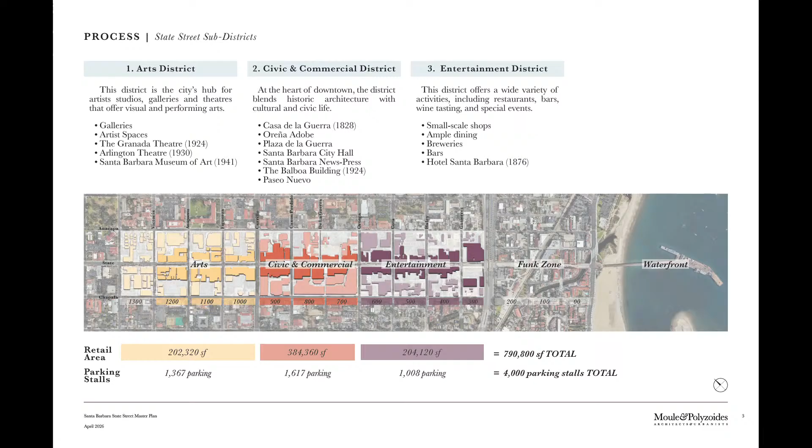So when one comes as an outsider and looks at this from an analytical point of view and sees 800,000 square feet of space divided, as you can see in the numbers in these 3 sub-districts, and 4,000 cars, the first conclusion is that this is a walkable district. That's an important, really a fundamental point of departure.

The other important thing to recognize—I won't spend much time on this—is that when you look at the ingredients of this place, the land uses, the great architectural monuments, this is one of the greatest built downtowns in the country. Its common buildings and civic buildings are really remarkable. The parking distribution, the service access mostly from the back, a bicycle network already active in the place, public transit active, and open space and streetscape also firmly established. So the basic ingredients are all here, maybe at different levels of strength or quality, but they're all here.

So this is a walkable district. It's been run over a long period of time. It has certain characteristics. It is perfectly endowed—it just needs to be rebalanced and rethought.

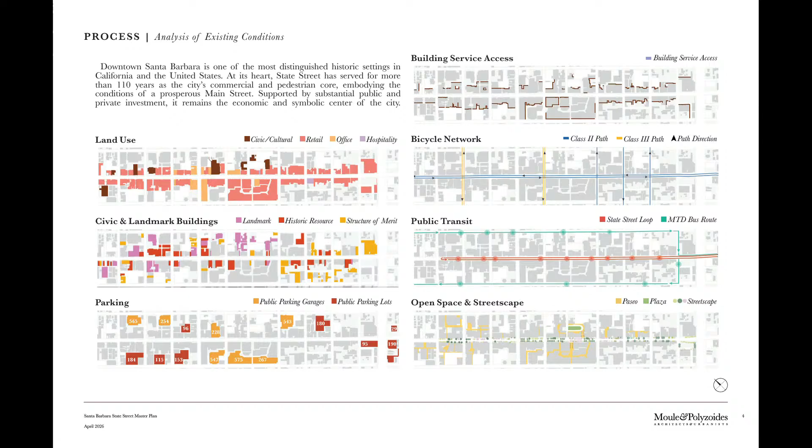We were not part of this from the start—we came into this process relatively late. There was a very robust public process preceding us, but we insisted on meeting with various groups of people to confirm what the key issues were. I'll repeat this because it's too important not to: there are mobility questions, questions of retail quality and levels of performance, infrastructure questions in paving and drainage, and landscape issues, because what's in place is old enough to need to be refreshed and rethought anyway. These are fundamental questions that bear upon how one designs this place in the future.

The idea of a flexible design acknowledges that there are two sides to this argument. There's the side that pedestrian and bicycle-based activities are very prominent and very unique here from a volume perspective, because of the nature of the city, its history, its climate, its location, and its form.

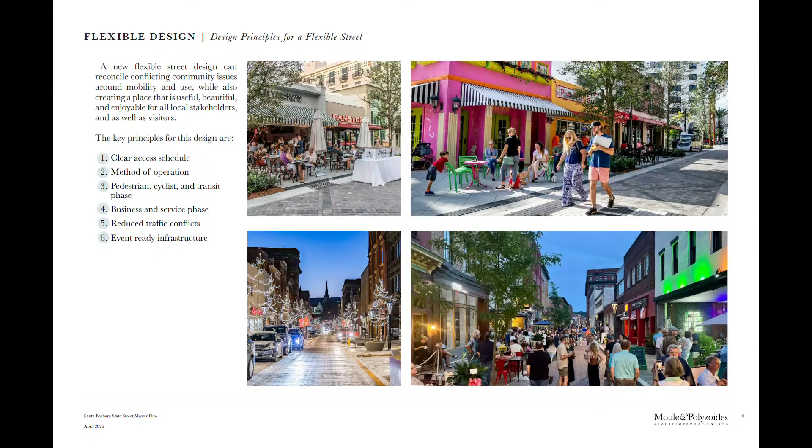There are a few key design issues that make the scheme we propose possible. One of them, most important, is that the street is 80 feet wide. If the street were 100 feet wide, we would be proposing something completely different. At 80 feet wide, with the need for a 20-foot fixed center for emergency access over time, and the need to put this relatively in the middle of the street, we start with a division of 30, 30, and 20, as you can see here.

Then the possibility emerges within the system, particularly if parking is limited to the garages as it always has been, of enlarging the pedestrian sidewalks to 30 feet and allowing a zoning of this 30 feet for outdoor eating and other entertainment uses, as well as walking.

And then in the middle of the block, we can have bicycles and transit during the day, going through to Victoria or even Sola. In the evening, with bollards placed in the street, we would allow both cars and bicycles to mix on the street.

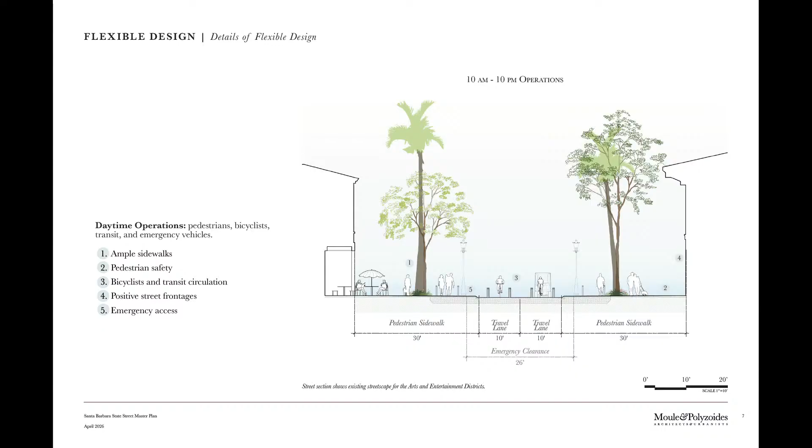In the evening, meaning probably the way we had started, we're showing 10 to 10 operations, 10 p.m. to 10 a.m.—night and early morning, not evening. This allows circulation to exist at a time when the volumes of both pedestrians and vehicles are exceptionally low. That is the mode of evening operation, service and drop-off at night, with all speeds slow and proper lighting.

There are many other issues, of course, that have to be imagined in order to operate such a system profitably and safely.

There is also a design question: because we have so many blocks of activity divided into three, it might be possible that the middle three blocks develop their own landscape, paving, and, to the degree possible, their own visual and architectural character, used in an exceptionally different way than the rest. So there is an acknowledgement in the scheme that nine blocks is too long a street to have exactly the same character.

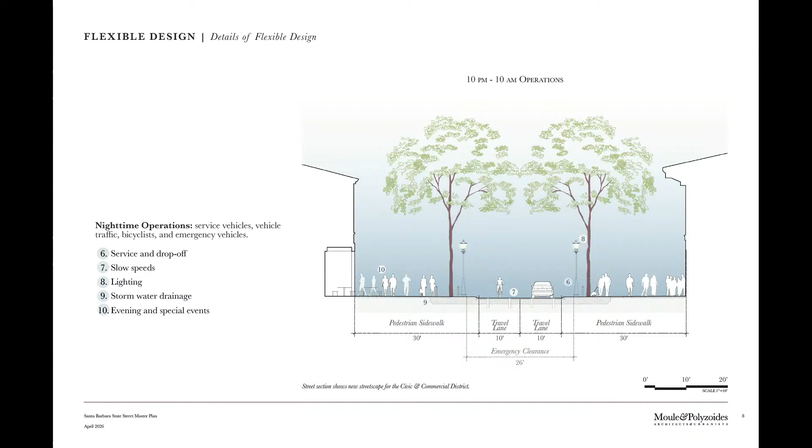And because the middle of State Street also has the greatest number of monuments, the most intense buildings, and the greatest civic activities, that area could also be revitalized over time to provide a more powerful kind of destination in any case.

So this is really the slide that shows the zoning. I think it's important to recognize that there are codes—your municipal design codes—that prescribe some of the dimensions of these zones.

We have a frontage zone for extension of dining facilities out there, then the sidewalk, then a transition area where we can accommodate seating, art, and other things within that framework. Then we have 3 extra feet for the possibility of emergency vehicles to lean on or park on, or move onto, to allow passage at night if necessary. We have to have a total of 26 feet for emergency vehicle operations, 20 feet for movement, and symmetrically on the other side, the same kind of accommodation.

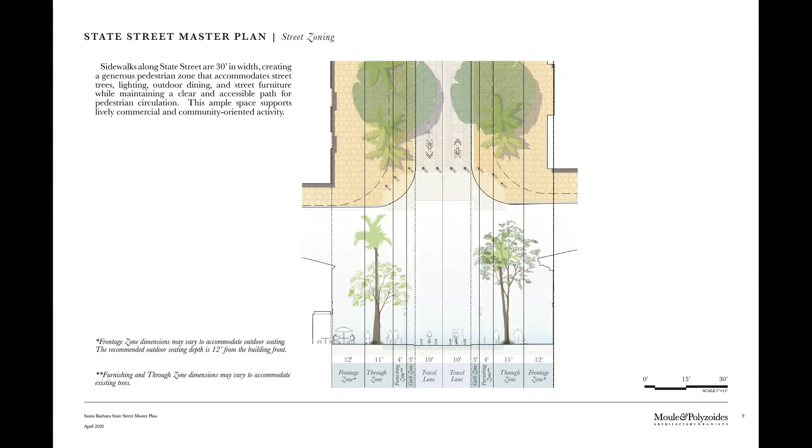Next, some of your questions—we've received your questions, and I think bollard placement is a very important subject. If you go back, in our drawings we showed a concave method. Do we have that slide coming? Okay, this image illustrates the way in which these bollards work.

Some of the bollards can be fixed, others, depending on where they're located, can be movable—very flexible, able to be brought up and down simply and remotely. Different people can have different access to them. That's a clear issue resolved in many other places in the country and abroad. But the question that was asked was, why is the placement concave?

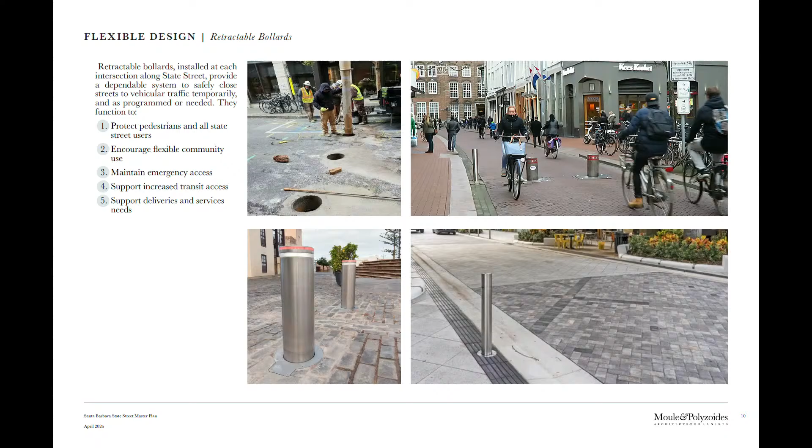We're actually, like in many other aspects of the design of this project, not only thinking about those things ourselves further, but also taking evidence from you and your thoughts about how something like this is done. The convex character had to do with protecting - if you go to the next slide, I think... give me one moment, I'll find the slide. It would be helpful to answer that question if we could. Thank you, Tess.

I think we're showing here the pedestrian crossing, and the continuous sidewalk passage, east to west or north to south, however you do this in Santa Barbara, in between the two, being placed behind the bollards, being placed behind this crossing in order to protect the pedestrians from bicycles that may be coming down at some speed. This brought up the question: what you're doing here is making a little eddy that cars can take a right and drop people off. One of the things we're now thinking about is which of the two is more advantageous to pedestrians. Miguel can speak to this further, but there are pros and cons about the exact location and shape of this placement.

Committee members, I wanted to highlight - there was an additional slide that wasn't included in this presentation, that was an accident on my part, but you should have it printed out, and it shows the different bollard placement. This slide that Stefanos was talking about, as well as the slide you have printed, shows a slightly different configuration for the retractable bollards that go up in front of the crosswalk area. It's something the team is exploring - both options have pros and cons. We can talk about it more, and Miguel can answer some questions on that as well.

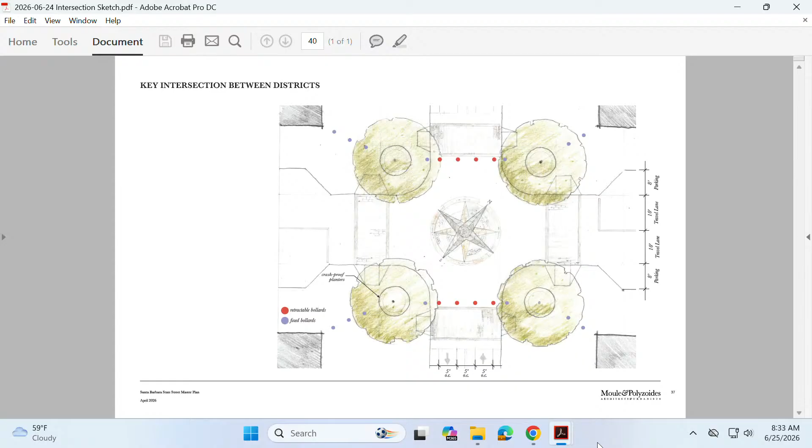All right, so back to our regular sequence. We spoke about this, and this is just a reminder of one very important issue, which is that these are the three block areas - 4 to 6, 7 to 9, and 1000 to 1200 - that illustrate the beginning specific ideas about how the sections I showed you translate into plan. They also illustrate the degree to which planting in the two end sections is actually maintained and enhanced, clarified, revitalized, and generally enhanced, and how in the middle we'll be hoping to put a new alley of sycamore trees and new paving.

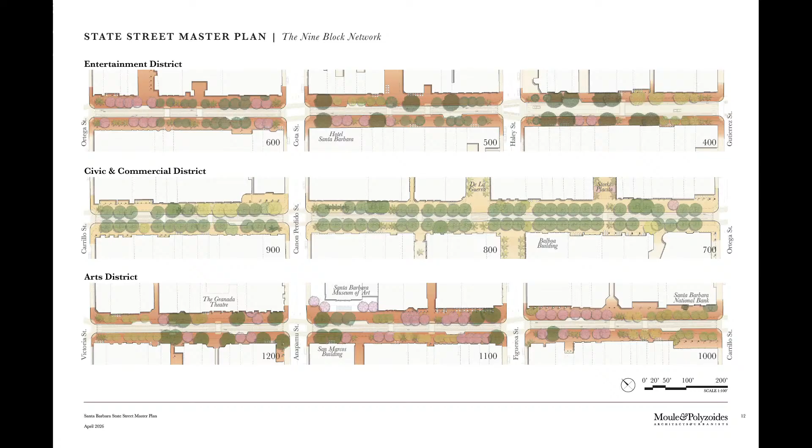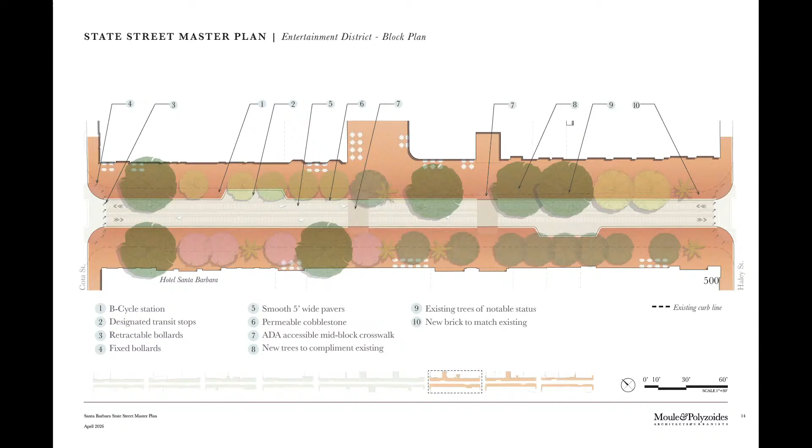In other words, change the architecture of the place to make it more unique and unusual. Perhaps introduce monuments of various kinds in art or otherwise, and invite people to have greater public engagement in those areas as well. A detailed version shows that 20 feet in the middle - there are crosswalks, at least 2 per block now introduced, along with the shorter crossings at the ends of the blocks, and there are places on each block for the electric vehicle transit to stop as well.

So these are beginning ideas - these are all intentions about how these things ought to happen, and of course there is an enormous amount of work to be done in realizing this in design when the time comes to the particulars. And next, the right of way can be beautifully detailed.

I just came back from a trip to Spain, and I marveled at the way in which that whole country is paved, in both cities and villages, to a quite incredible degree.

What we're trying to accomplish in public space is to see to it that where we have significant paving in place, like the 4 to 6 block and the 10 to 12 block, we retain the brick. We could enhance it in certain ways, but it's all there. In other places, the central 3 blocks, we'd want to introduce stone if we could, or concrete, however that ends up being played out.

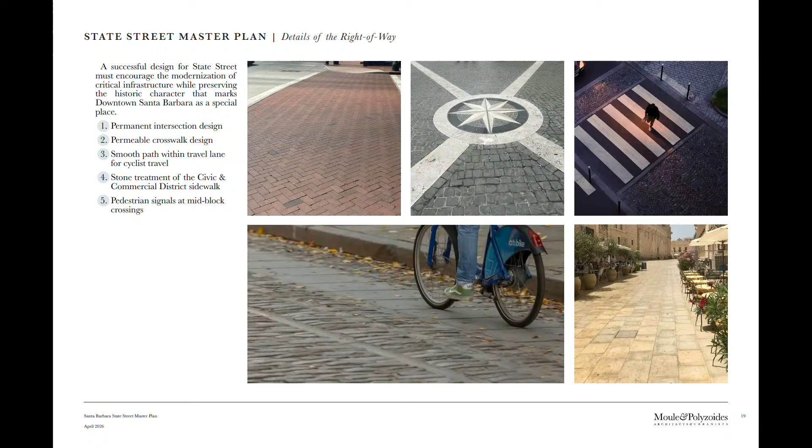The street itself needs to be designed with patterns of paving and compositional ways of combining these that encourage bicyclists to slow down and prioritize the crossing of pedestrians whenever they cross. So this has to look more like a plaza than a street, but it also has to function as a street for obvious reasons.

The reasons are both emergency vehicles, and in the summer, a flow of over 1,000 bicycles a day, which is an unusually high number. I'm actually not aware of such a high number anywhere else in the country, Miguel. This is a truly unusual number.

The public space is also enhanced by canopies of trees, low planting, special kinds of lighting, seating, and barrier setting, and many other dimensions of public space design that give this particular character and quality. When you put all of these things together, I think we can now begin to vision this as a place.

One of the very unusual and rather disturbing aspects of the last 5 or 6 years is that closing down the street and converting it to a more pedestrian-dominated mode did not change its form. It neither looked better, nor performed better, particularly from the point of view of how fast electric bicycles dominated that space.

If you put all of these things together we spoke about, this is how this portion of the street—I think we're in the middle portion here—would change over time. There would be a central 20 feet with rolling curbs on the side.

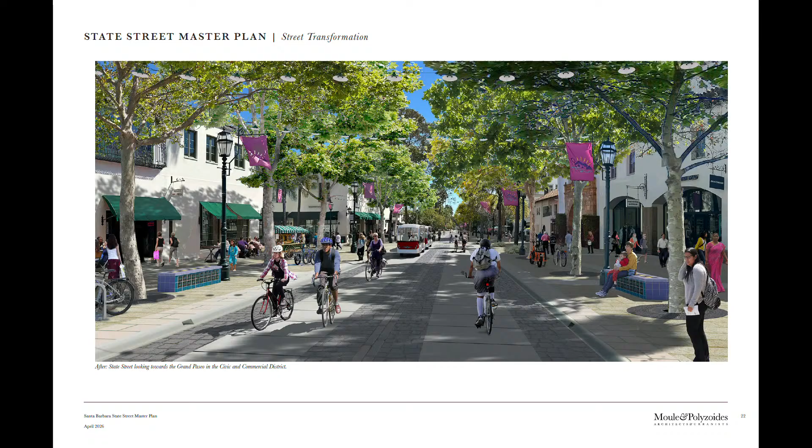Here we have the beginnings of the spring moment in the life of sycamores, which after probably 10 years begin to join and create this marvelous canopy. We have Southern European examples where these sycamore trees, after 30, 40, 50, 100 years, are really monumental and make this place look extraordinary in its presence.

Next, we have the upper portion, which has a similar kind of configuration right now in the way it's being used, but is transformed with a much more diverse streetscape, using similar ingredients of the plan as I described, but especially designed for the place.

That example would be, of course, the continuation of the brick sidewalk, which gives the place an entirely different character.

Although the eating arrangements at this point are represented rather modestly, this could over time be a far more active and lively place, with many more people eating outdoors and so on.

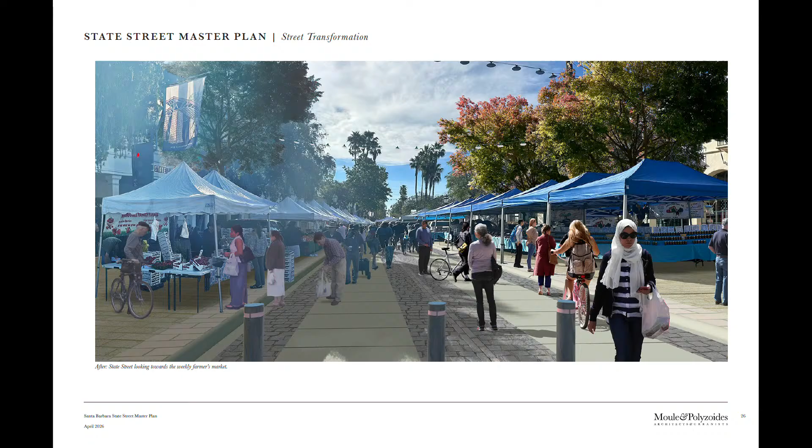The same kind of arrangement, the same zoning for the center of the street, can also be used for special events by making sure the infrastructure is in place—for instance, to see the farmers market be a continuous and strong presence there. You can also see the bollards introduced here to show how the system is protected on both ends.

We also chose to show you what a 30-foot sidewalk looks like. It sounds like an enormous dimension, but it really is not.

Currently, in most places along State Street, this 20 or so feet that are in place—18, whatever that sidewalk is—is sliced and used in a very diverse and confusing way, actually. But when you look at what this could look like as a 30-foot sidewalk with the existing set of trees in the middle of it, essentially, that would be a very unusual streetscape and a very unusual place, and I think a very distinctive and good one.

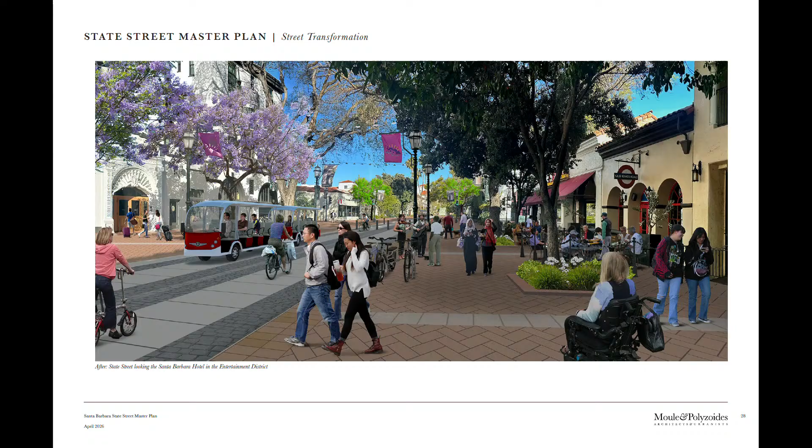So, some more of your questions. The issue of surrounding streets: we have no jurisdiction on the subject of the streets being changed, or no voice, actually, because we are working strictly on State Street.

But it is very clear that there's an orientation question here of a remarkable kind. The one-way streets are forcing people up and down into the system. It's very difficult to return to where you are to come across. And also the one-way system, speedy as it is, is driving people out as opposed to in. It needs to be better designed from the perspective of providing direction as to access to parking.

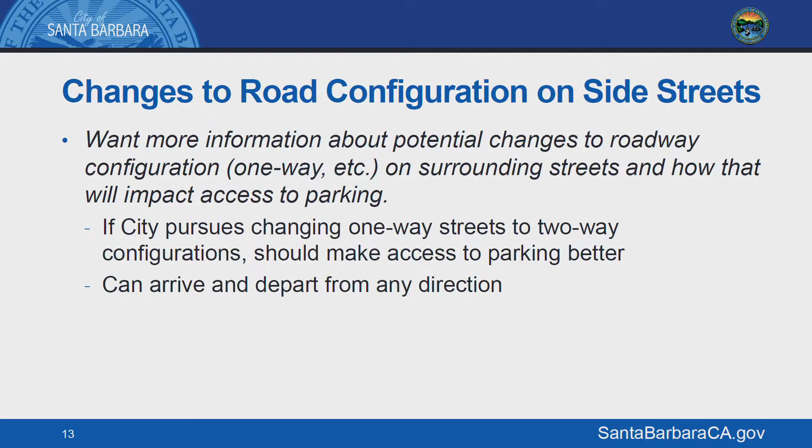And so the two-way system would be slower, would be more directional, I think is the right word, and also it would provide a sense of certainty about how one accesses State Street coming into the city or going out of it. We are suggesting that this be studied. Essentially, we have no say in how this would be done, or whether it should be done at all. But from the experience of having worked elsewhere, I think this is an important idea that needs to be addressed seriously in the future.

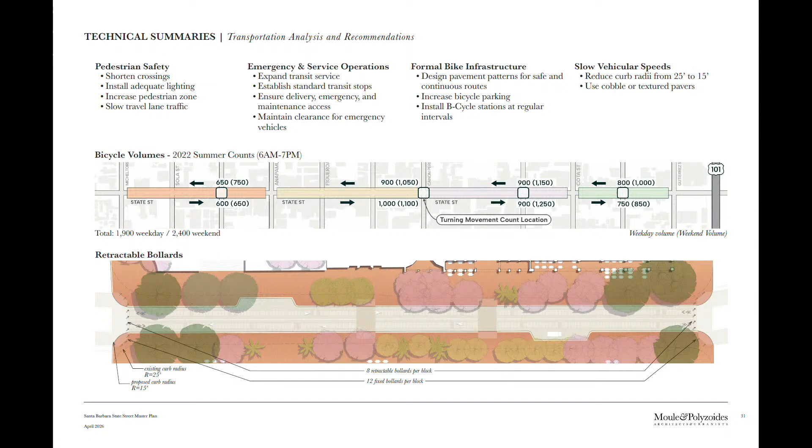And now a few words on a few things, I won't speak very much about this. This is just Miguel's slide on the peak use of State Street, I believe at the 10 to 12 portion, right around 6. Are they mixed? Okay, but nonetheless, it shows the peak movement at 1,000 or so bikes each way, bikes each way, and it's a reminder that to propose a scheme like this, one has to have the data that supports such a move.

The other one is the question of infrastructure that you spoke about at some length, Tess. I think there is an issue here of flooding on the street, and if one was going to change so much about the configuration of State Street, one would have to address the question of the utilities and of flooding. This drawing shows, on the bottom, an exaggerated vertical dimension.

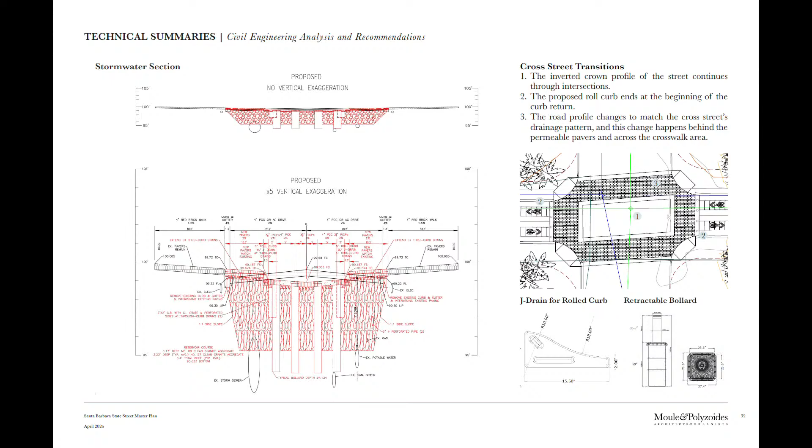At the top, the actual dimension of the depth is about 4.5 feet, something like that. The fundamental reason why we are not talking about either elevated intersections or a plaza project is because the camber of the street has to be reversed from convex to concave, in order to hold the water and let it percolate into the ground, and run across intersections in the process of resolving the control of the flow and the storage of the water.

How will vehicle stopping work when the street is open to private vehicles? Pulling up on the curb will not be allowed. There are pull-outs, as I spoke about before, and it's going to be very consistent with the way things were before. There was no stopping before, anywhere, in the previous condition. And I also spoke about the cross-street questions, which I think are fundamental to what happens in the future.

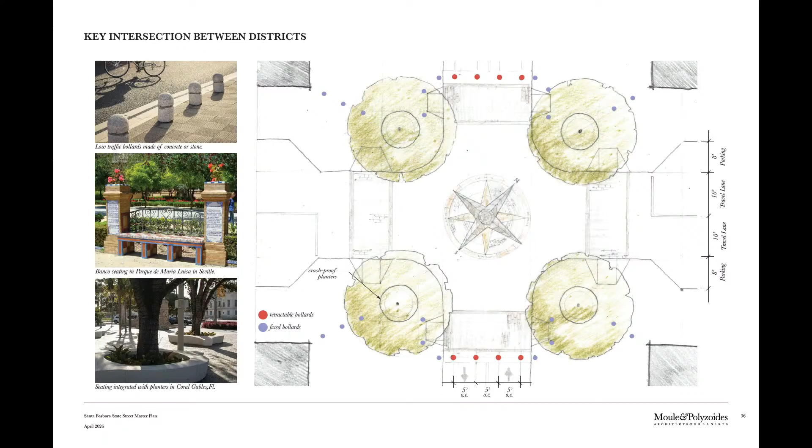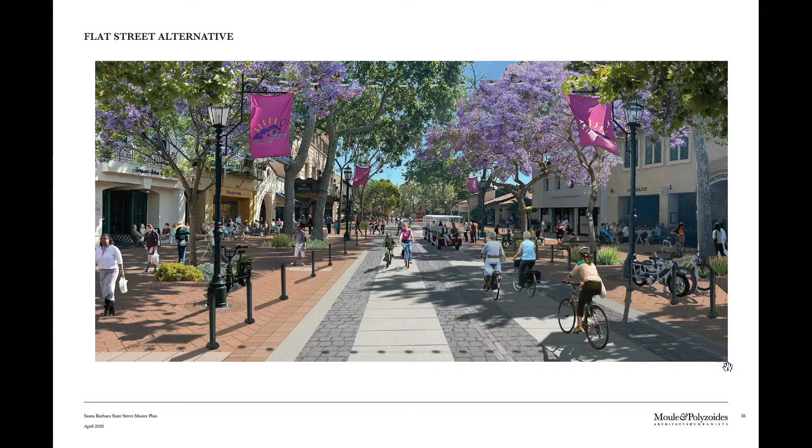Flat and flexible, I just addressed it. I think I didn't speak about that issue — if you go back, it's here. If the street was also flat, assuming we didn't have the water issues to deal with, we would have to have a gazillion bollards up and down on a flat project to keep cars from going across. It'll be bollard city. These would be flex bollards, but in the hundreds probably.

I think we spoke about this one, and it's terribly important for you to also recognize, although we did not have a retail consultancy that dealt specifically with these kinds of questions, we've worked in enough cities where the issue of how one guarantees the proper working of a retail environment is very much at the forefront of any effort to fix a street of this kind.

So we have access and signage questions, parking and surface structure, structure behind surface in the cross streets, streetscape and landscape issues, how one fixes zones for retail, dining, entertainment, the need for public programming, the exceptional need for housing downtown, quality of storefronts being regulated, transit — electric in this case, but transit nonetheless — to enlarge the number of people moving north-south, appropriate lighting both on the street and on the edges against the storefronts, and safety, a universal need across the board. All these issues are really critical to the way in which a street like this is designed and run.

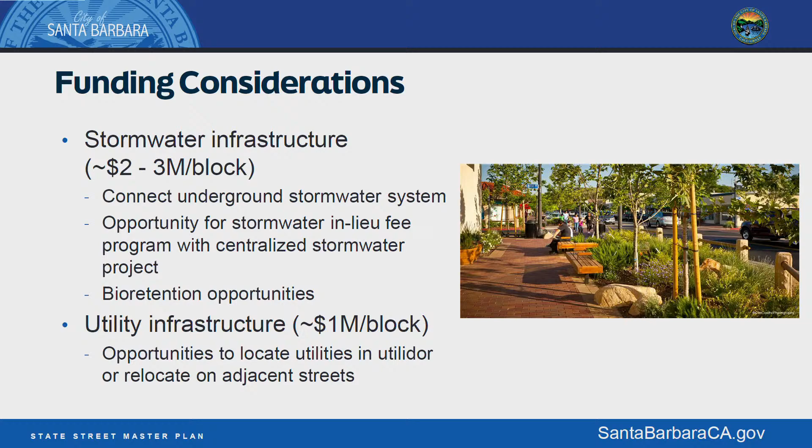That's really inconsistent and challenging when it comes to maintenance work, and it means we're ripping up the street each time Edison, SoCal Gas, water or sewer needs to be upgraded or maintained, rather than keeping it in a more maintained configuration. We call it a utilidor - one area where you can confine utility work and not have that occur.

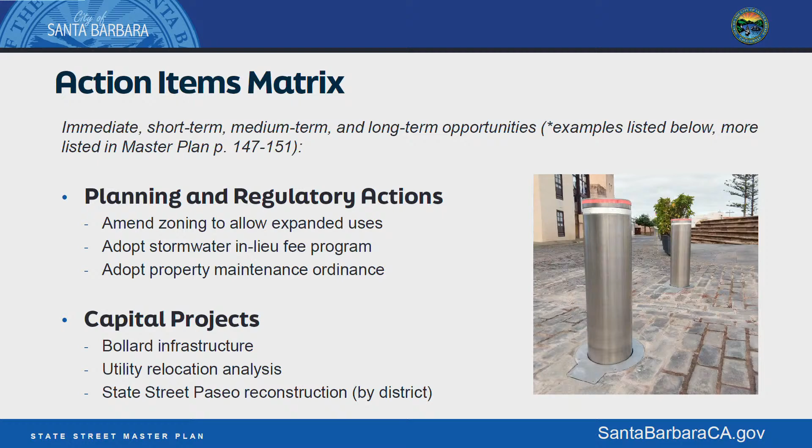It's also important when we're thinking about more housing development downtown and looking at capacity for an additional 1,000 to 2,000 new housing units. This is what I was mentioning earlier, just the action items matrix - there are many others, but bollard infrastructure is one thing that could happen fairly early on, along with amending zoning to allow for expanded uses downtown and adopting a property maintenance ordinance, as examples.

A question came up about parking revenue as a potential funding source for plan implementation, asking to expand on that and what the implications are for DTP. I recognize this response is not a great one, but honestly, I'm not sure. It was a thought that if in the future there is a surplus and an opportunity to use some of the funding for downtown improvements, maybe it's an option. It doesn't mean it is the funding source we're going to be using. I also think it's important to note that if it was a potential funding consideration, we would be having that discussion with you more thoroughly about whether we'd want to move in that direction. So it's probably still a little early, and something I'd be happy to get comments or feedback on. We can certainly modify the language there.

Another question was on CEQA - how locked in is the plan, and what is the potential for it to change in light of CEQA review? We anticipate that more detailed CEQA work will happen during the detailed design and engineering work that we would like to do in the next 12 months.

We've had many discussions with our city attorney's office on CEQA and what that process looks like. There are some studies that will need to be done to determine how we proceed with CEQA and what kind of resources may exist in the street.

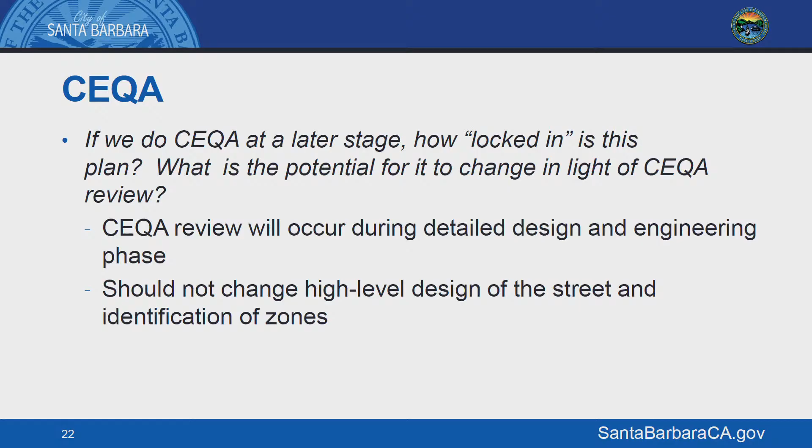I wanted to highlight the council action on April 28th. We took the draft plan to council. We had wanted to get the direction from council on whether this is even in the realm of, are we moving in the right approach?

I've done a lot of reflection over this process. It's been less than perfect, to say the least, but we started out, and there's been so much interest in so many different things, and we started out with a conversation on everything, including what does the street furniture look like, and where are we going to have a stage, and where are these other elements that everybody really wants to see and gets excited about are going to be, without really identifying what the space in a basic layout looks like.

And so that's where we started to have tension, I believe, when we talked to the community and not being able to really get a project to move forward.

I also believe the flexible project makes it so as things change in the future, there are opportunities for the street to change without actually having to reconfigure the street. And that is a really important element, because regardless, we are going to have an emergency access area, and probably that will continue in a future state. So the street use can change, but the street configuration doesn't necessarily have to.

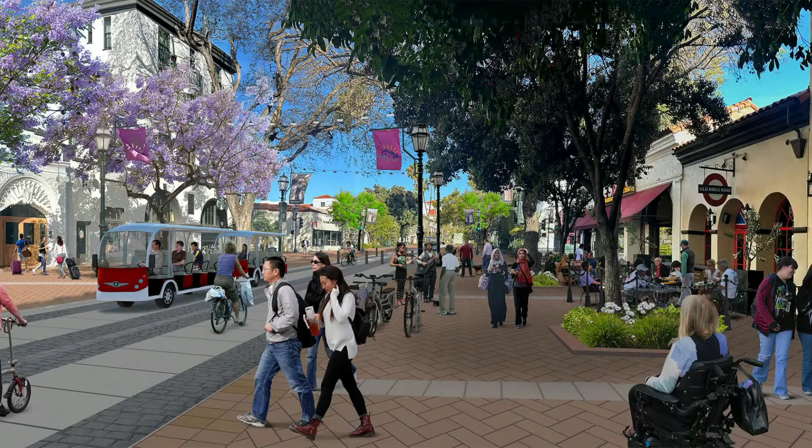I think that is the end of our presentation, but I do believe the project has a lot of opportunity for downtown, and just reinvestment into a downtown core that is in need of some reinvestment from our community, and I think it will only benefit from this type of work. So thank you, and we have Stefanos here as well as Miguel Nunez with Fehr & Peers to answer any questions the committee may have.

All right, thank you, Tess. And thank you to the team for being here and presenting this. I'll make a couple quick comments and then we'll go to committee questions.

I think the first comment I ever had about this project was on the RFP, and it'll take way longer than what was in the RFP. You mentioned perhaps the process was less than perfect. It's never going to be perfect on a project like this. That's not how planning works. So I want to congratulate the team for getting to this stage in the process. We're a lot closer to the finish line than the start line.

Thank you very much. I did have one kind of big picture question about the plan itself, because I was a little confused by this. There's a lot of appendices, but they're not referenced in the document. So when I was keyword searching like parking, a lot of the most interesting stuff was in the appendices. So what is the significance of the appendices? What binding effect, what guiding effect do they have for implementation moving forward?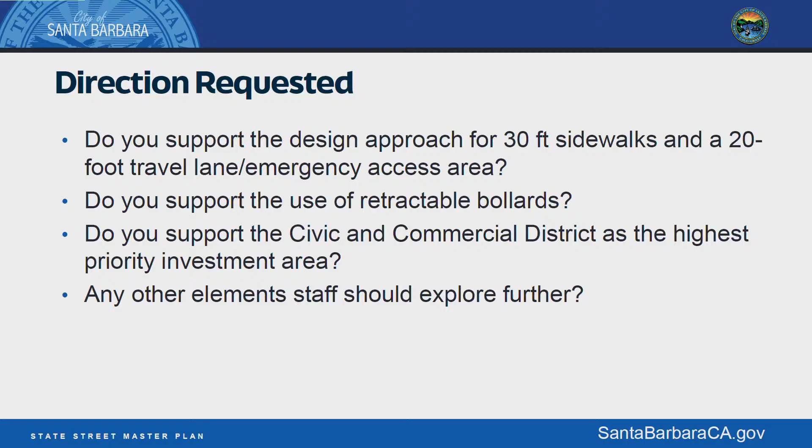All right, so with that we'll ask the question, then folks can opine: do you support the Civic and Commercial District as the highest priority investment area? Those that are, say yes. Yes, seeing 5, so 5-0 again. Any comments on this question?